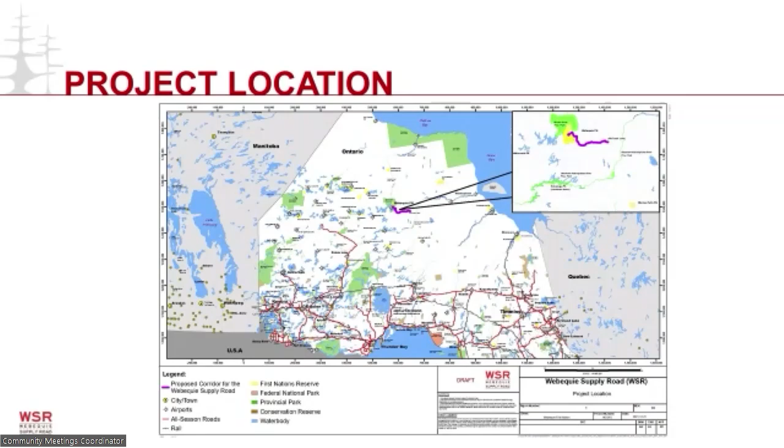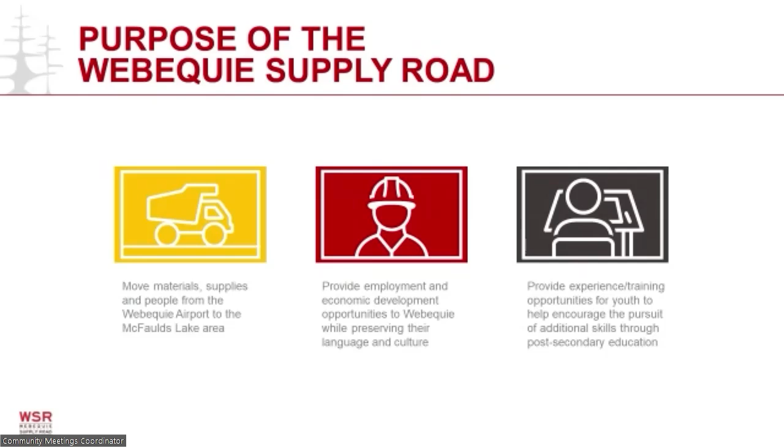Webequie First Nation is about 200 to 250 kilometers from the Hudson Bay and James Bay coasts, and the planned Webequie Supply Road runs south of Webequie and then east to the Ring of Fire area. The purpose of the road is to move people and supplies to the Ring of Fire area, create jobs and business opportunities for community members, as well as skills training opportunities for young people.

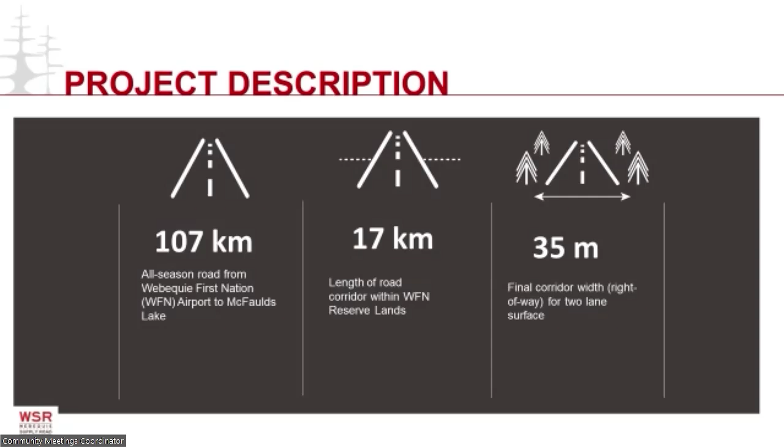As this is Webequie's project, it will be done in a careful, sensitive way that preserves and strengthens the community's language and culture. The planned road will be 107 kilometers long, with 17 kilometers on Webequie First Nation reserve lands. The corridor planning area is 2 kilometers wide, but the actual cleared area will be 35 meters wide. The road will make 6 major water crossings and will include temporary pits, quarries, equipment storage areas, and 4 construction camps.

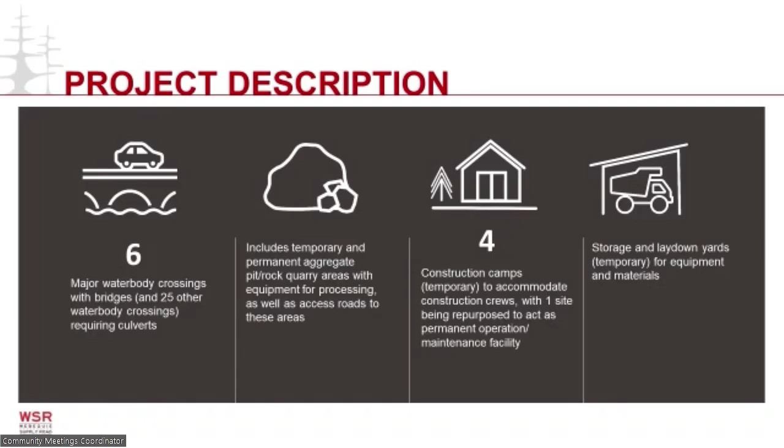Now let's talk about the communication we have had with Indigenous communities. In our rounds 1 and 2 of consultation with communities, the project website was updated with new information, notices were sent to all 22 communities offering a variety of engagement options, and in-person and virtual community sessions were conducted, as well as streaming sessions to help community members better understand the process and the project overall.

As mentioned, the WSR consultation team offered opportunities for all 22 Indigenous communities to provide input on the project during round 2, as we previously did during round 1. The virtual community sessions with each of the 22 communities were heavily promoted through social media and email.

A variety of input was received on the project during round 2, ranging from ownership and responsibility for the completed road, impacts of climate change, employment and training opportunities, business opportunities, and impacts on treaty rights to potential downstream impacts to coastal communities. Much of the feedback related to topics that will be addressed as the project moves closer to construction, or those that are of a more regional nature and have their own process, such as federal regional assessment.

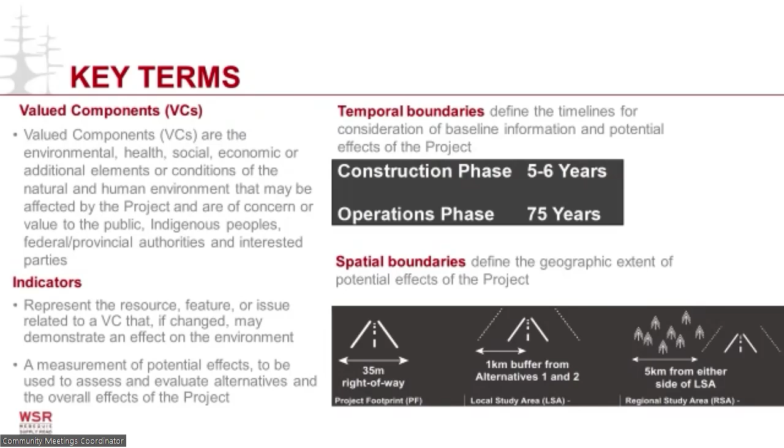Before we go further, let's review some key terms. Valued components, or VCs, are what are to be studied in the EA and IA. Indicators are the ways to measure potential effects for VCs. Temporal boundaries is the timeline for assessment, and spatial boundaries are the geographic areas for assessment.

Now we are going to talk about how the effects assessment is done. Engagement and consultation, as well as Indigenous knowledge, land, and resource use, feeds into the effects assessment steps, including identifying what will be studied, defining boundaries, identifying possible effects, and which are left over after mitigation, then looking at all effects together, and then identifying follow-up and monitoring and overall advantages and disadvantages of the project.

We have received a lot of IKLRU information so far, including the purpose of traditional ceremonies, reliance on country foods, and climate change impacts.

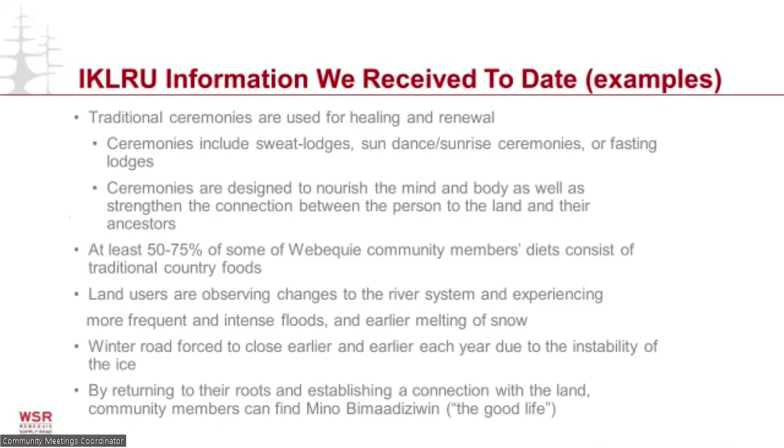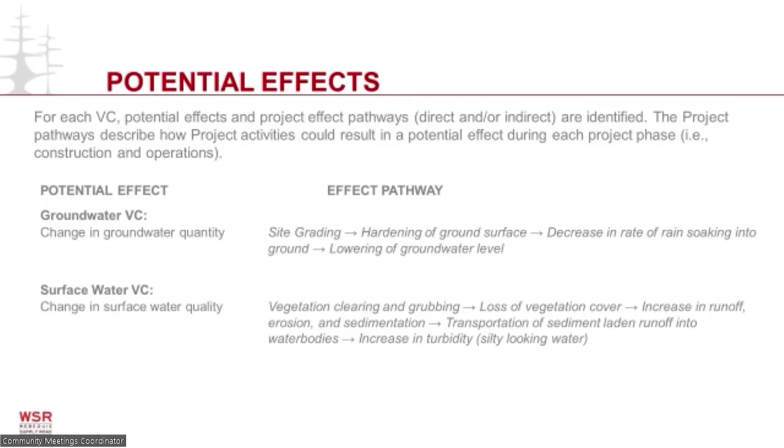Existing conditions for each of the VCs are described through background research, engagement and consultation, and field studies. For each valued component, we look at potential effects and pathways, meaning how it happens and the route followed. For example, grading or reshaping the land as part of the project usually hardens the ground, making it harder for rain to get into the soil and lowering groundwater levels.

Mitigation can be done in different ways: elimination of effects, reduction or control of effects, and offsets, where improvements can be made elsewhere to improve fish habitat, for example.

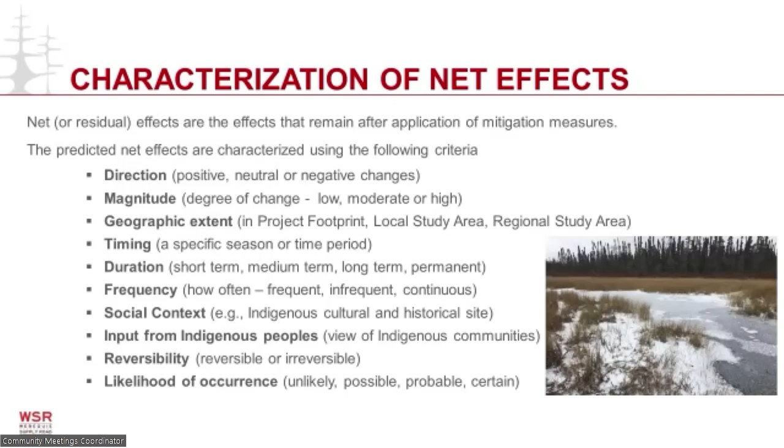When we describe the net or leftover effects, we talk about the direction of the changes, be they positive or negative, the amount of change, the area impacted by the effect, when the effect will occur, how long the effect will be, how often it will occur, the social or cultural effect, whether the effect will be permanent, and how likely the effect is to occur.

We determine how significant net or leftover effects are using a number of methods, such as scientific experts working with community members, assessing risk, ranking or weighing effects, as well as the professional judgment of experts using their knowledge and experience.

Cumulative effects are the net effects of a project, combined with the net effects of other past, present, and future projects. It recognizes that the project does not sit alone in terms of impacts.

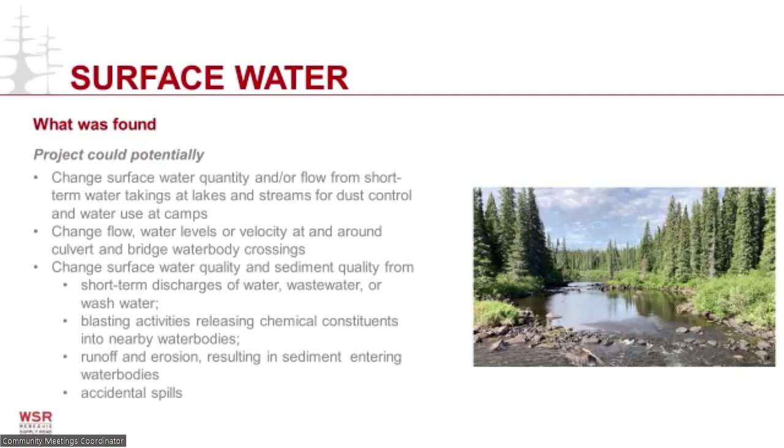Blasting activities could release chemical constituents into nearby water bodies. Construction activities that cause erosion and sedimentation could result in increased suspended solids and particulate matter entering water bodies. There could be runoff and erosion from constructed surfaces like roads and developed areas, leading to the transportation of suspended solids and particulate matter into water bodies. Finally, road maintenance activities could lead to the deposition of sediment into water bodies.

In terms of what we plan to do to mitigate potential effects on surface water, we can use roadway design to effectively manage runoff, use frequent cross culverts in muskeg areas to prevent water backup, design crossing structures to handle higher flows, and implement control measures and a spills prevention and emergency response plan.

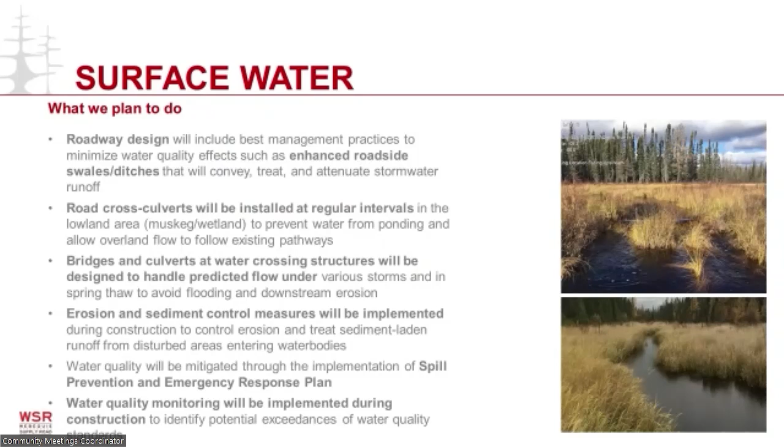Let's now talk about fish and fish habitat. In terms of what was found, the project could potentially impact fish and fish habitat at crossing structures through changes to watercourses and water bodies, resulting potentially in the release of sediment and the occurrence of spills. Fish harvesting could also increase due to increased access to the area.

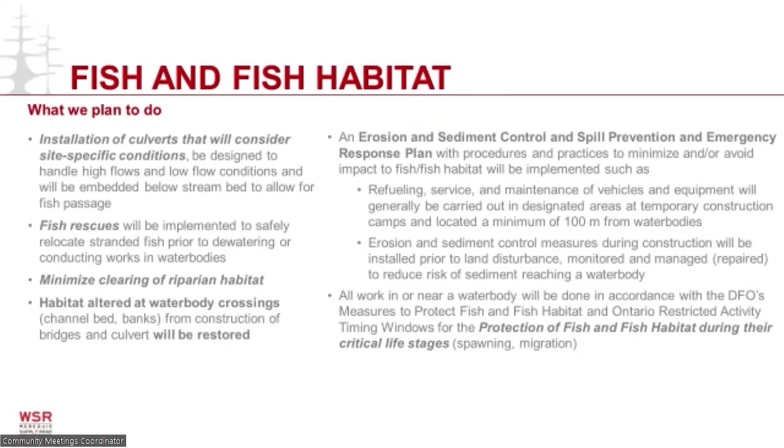To mitigate or reduce the impact of these potential fish and fish habitat effects, properly sized culverts allowing fish passage will be used. Rescues will be done. Clearing of riparian habitat next to watercourses and water bodies will be minimized, and habitat will be restored at water crossings. Construction will be timed to avoid impacts to critical life stages of fish, and erosion and sediment control and a spills prevention and emergency response plan will be developed and used.

Part 2 of this presentation will continue with the preliminary results of the effects assessment for selected valued components and discuss cumulative effects. As of now, the plan is to finalize the environmental assessment in 2026.